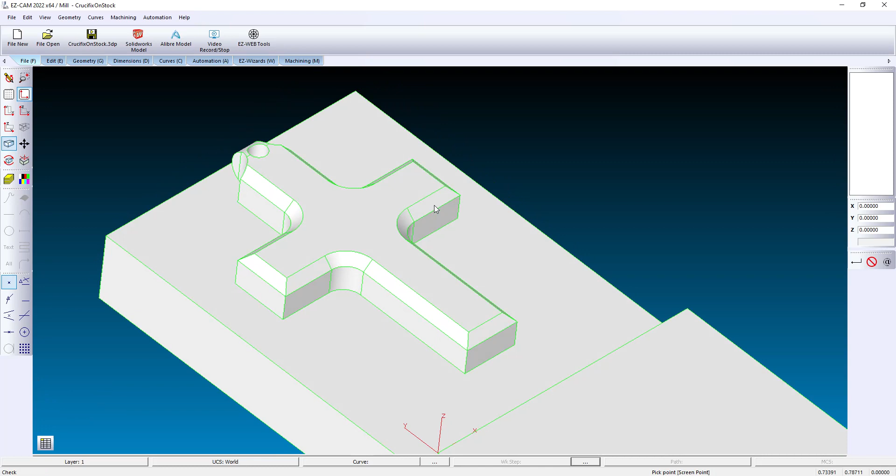We're going to show you how to machine the chamfers and the radius over here using a 3D toolpath. We're going to start with our hole, so we go to Automation, New Holes. The diameter is .625. Depth will be 0. Let EZ-CAM extract that from our surface selection.

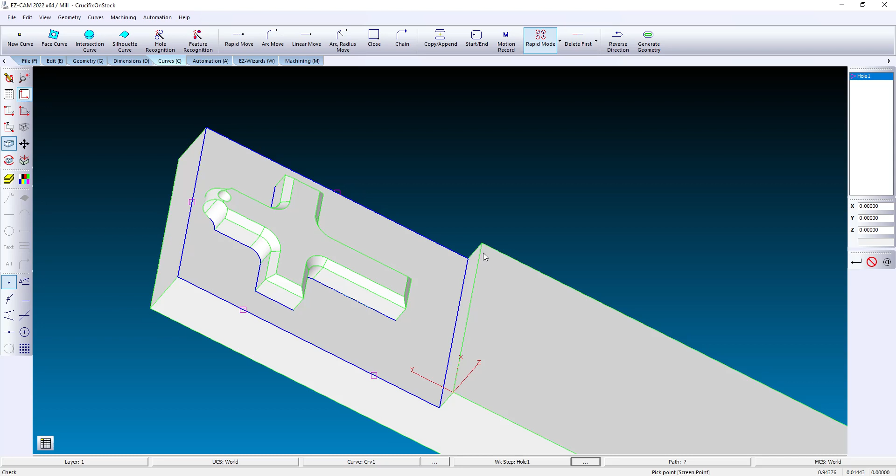Now we'll machine the outside boundary, the flat surface, up to the part. We're going to add a face curve, detect open edges. The squares represent an area that the tool can over travel. We can't over travel against this wall, so you can see we give you a straight line.

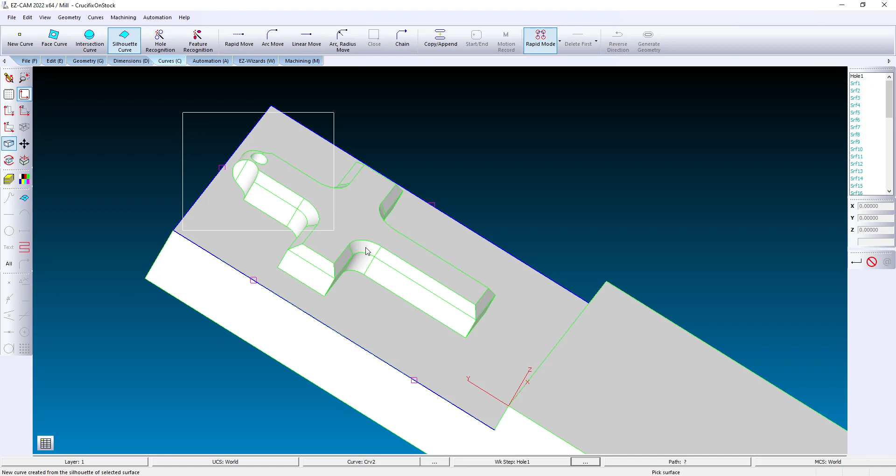Now the part boundary, unfortunately we have an undercut. So that's a little bit of a challenge, so we're going to get past that by creating another curve. So I'm going to delete that one. We'll create a new curve, silhouette curve, window our part. And if you look, we have a perfect outside boundary.

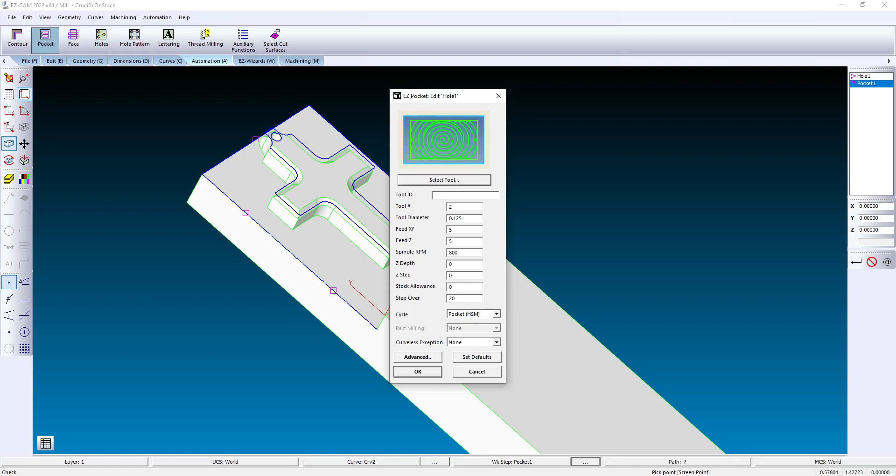Automation, new pocket. Let's change the step over to 20%. We'll use high-speed machining. And we have to select our curves, the outside boundary first, then the inside. Verify.

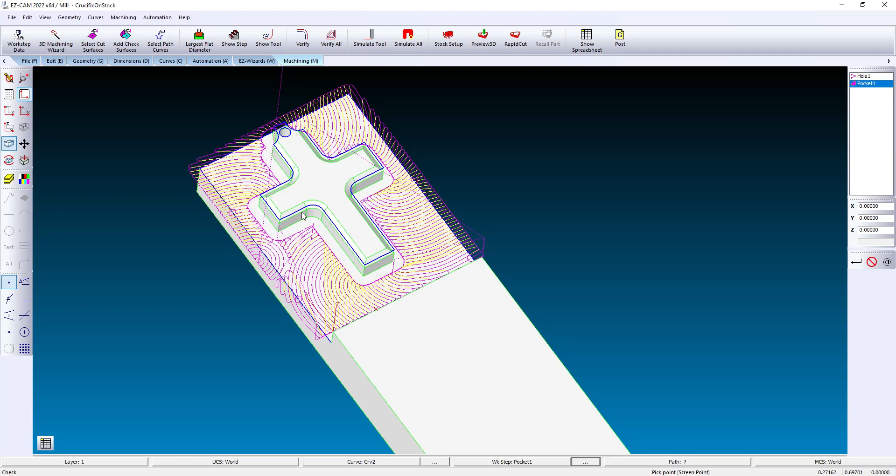And you can see our tool is coming down, starting on the outside and working its way inward. So when we have the rough stock, we're not going to hurt the tool. 3D preview. Looks good. So now for our 3D toolpath, I'm going to hide the curves.

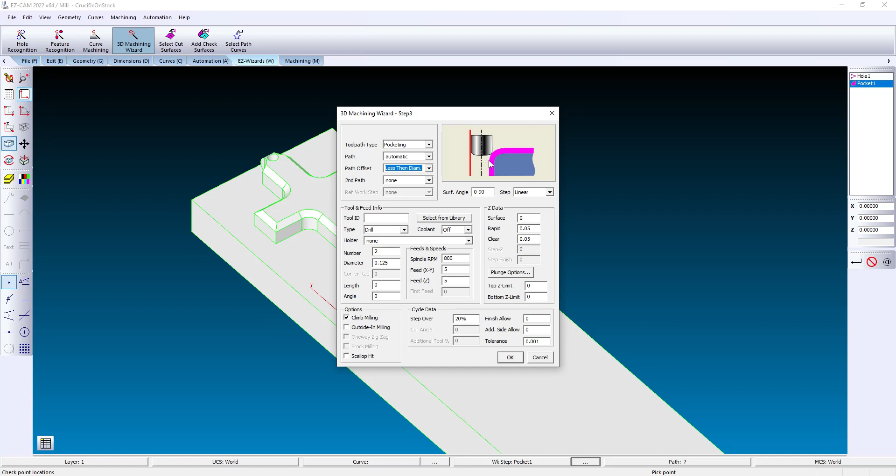The wizards. We'll select a pocket style. Path offset, let's go less the diameter. So when I use a ball nose tool or a bull nose tool, it's going to come down tangent to the bottom of the surface, so we get a nice clean pass. We're going to change to a ball end mill. Let's go in with a .0625.

Change our step over, let's say .001. Tighten up our tolerance to get a better finish. By tightening up the tolerance, you get more G-code, of course. We're going to go outside in milling. Turn off the smooth high-speed machining.

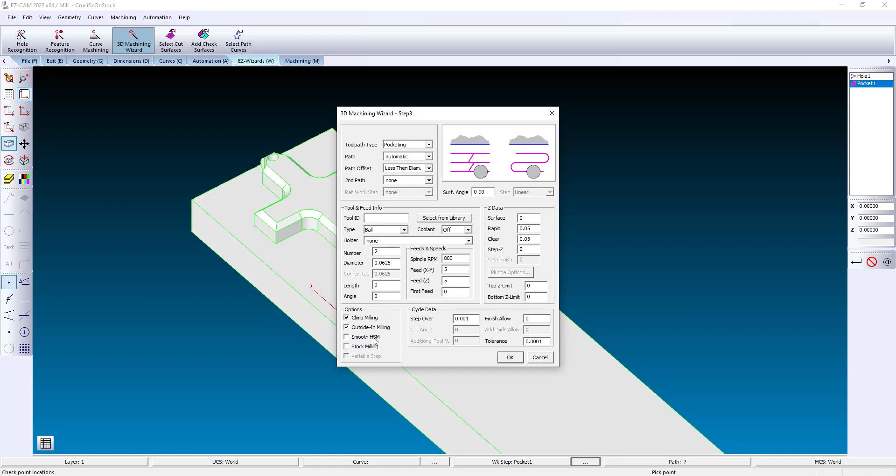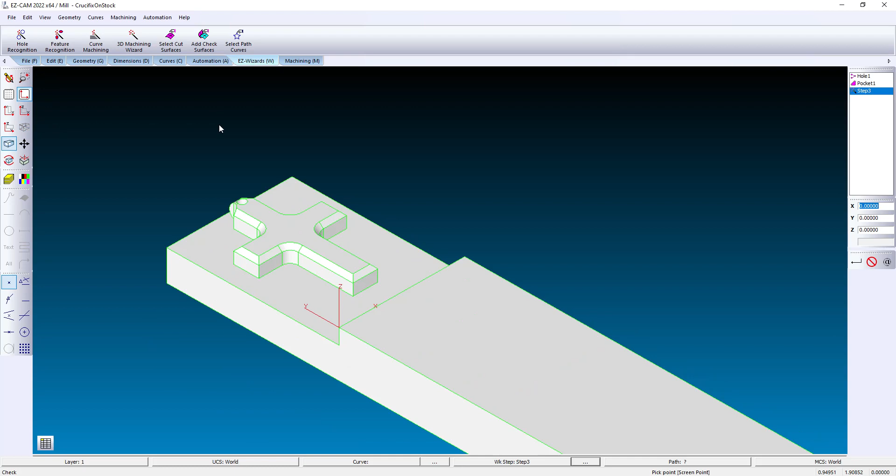So now we need to select our cut surfaces. I'm just going to use a side view and select our chamfers. Let's include the radius. Now everything else becomes a check surface, so we don't violate the part. Verify.

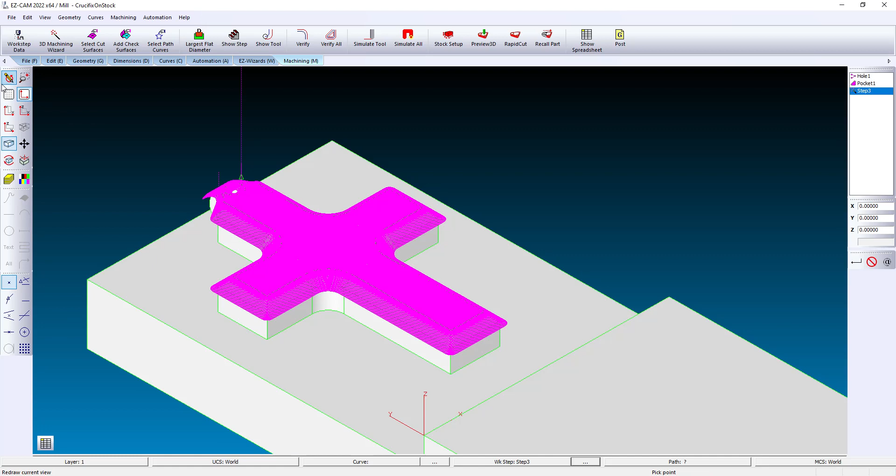Okay, we included the top surface. We don't want to do that. So what you do is you go back to cut surfaces, click on the horizontal surface, enter. Then we go back to check surface and include that. Don't violate it. Verify again.

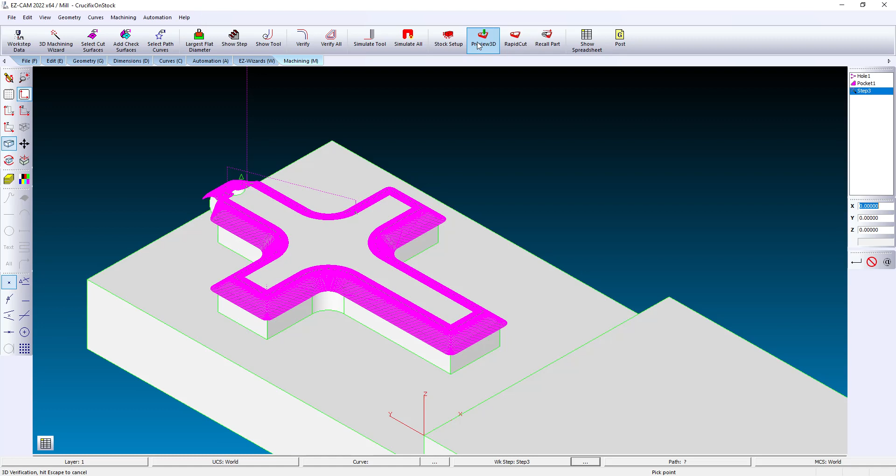And we'll take a look at a 3D preview. And we're ready for G-code. That part came out really good.